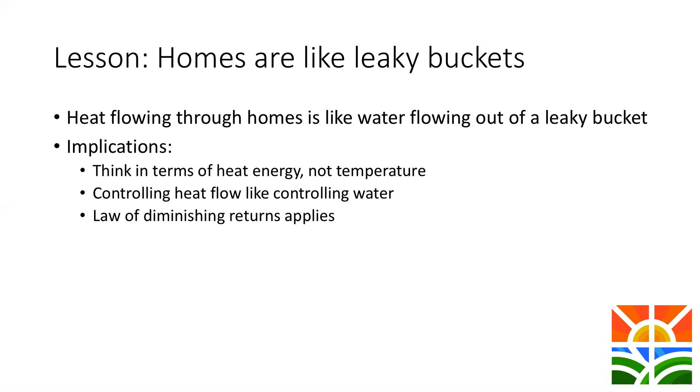Next lesson. Having seen lots of houses, I've formed the view that a useful way to think about houses is that they are like leaky buckets. Heat flowing through our homes is like water flowing out a leaky bucket. In this metaphor, each hole represents a different pathway for uncontrolled heat flow: walls, floors, windows, ceilings, and so on. The implication is that it's good to think in terms of heat energy, not temperature. Controlling heat flow is like controlling water, in a sense, metaphorically. And with that thinking, it helps us understand how the law of diminishing returns applies. So it's not worth your while going all out fixing one hole if you've got these other holes that haven't been dealt with, for example.

Good performance is impossible without fixing all or most of the problems. So in the leaky bucket metaphor, it's still a leak - if you start off with 5 big holes and you fix 3 of them, it's still a leaky bucket. In other words, it's important to look at the big picture and address, to the extent you can, all the pathways for uncontrolled heat flow. But patch the biggest hole first, you know, it's a good place to start.

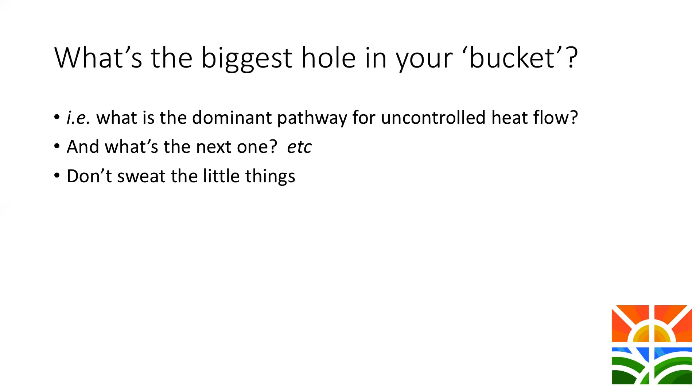So think in those terms: what's the biggest hole in your bucket? In other words, what's the dominant pathway for uncontrolled heat flow at your place? And then what's the next biggest hole, and so on, until you've really turned your leaky bucket into something that's a lot more tight. And don't sweat the little things. So this way of thinking can help guide decisions about priorities.

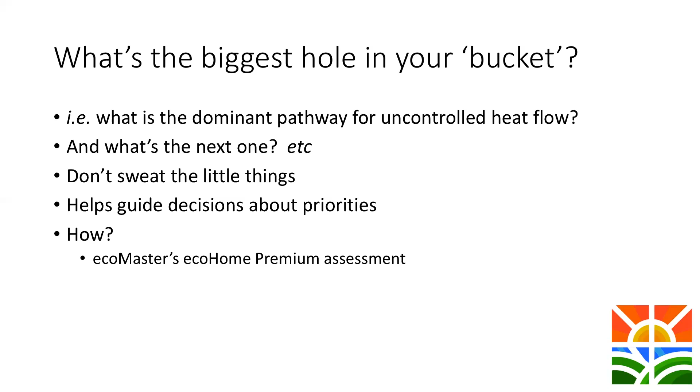When I do ecoMaster assessments, we look at it in terms of trying to characterize the heat loss pathways and determine the dominant ones, so people can understand where the heat's going and where to focus their efforts.

In that context, it's really important to take the view that the thermal envelope is where a large amount of our effort should be spent, as opposed to perhaps focusing on gadgets. Improvements to the thermal envelope obviously directly reduce energy spend.

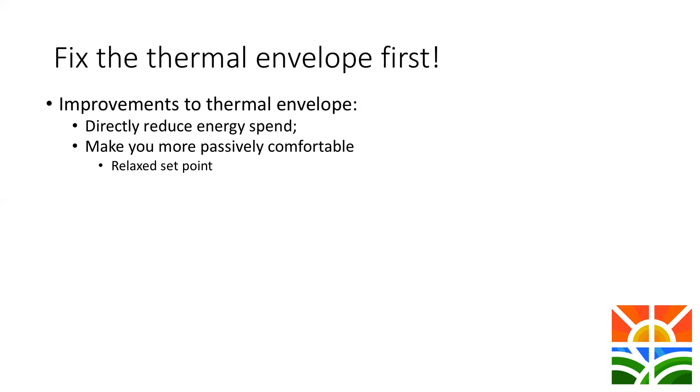That's obvious, but a lot of people stop there. Improving the thermal envelope can do so much more than just reduce your energy spend. It can make you passively more comfortable - you can ease off the set point on your heater if the thermal envelope is better. There are fewer hours of the year during which active heating or cooling is necessary.

It makes your house more resilient. In a climate changing world, it makes our houses more climate safe - in other words, they're at less risk of being dangerous places in extreme heat waves. Tight thermal envelopes reduce the risk of condensation, so less mold, improved air quality.

Heating systems work better - they don't have to work as hard, and they're not blowing on you as much. Less stratification of air.

A surprising side effect of having a better thermal envelope is the house will be quieter. There'll be less carriage of noise from outside to in when all the gaps are plugged and the insulation is better. And likewise, if you're having a party, your neighbours are going to be less disrupted by you as well.

And lastly, if you've got a better thermal envelope, you won't need as big a heating or cooling system to begin with. So there are all these other side effects of having a better thermal envelope, well beyond just reducing energy costs. It sometimes bothers me that this discussion in the popular media seems unreasonably focused on reducing costs, but there's so much more to it than that.

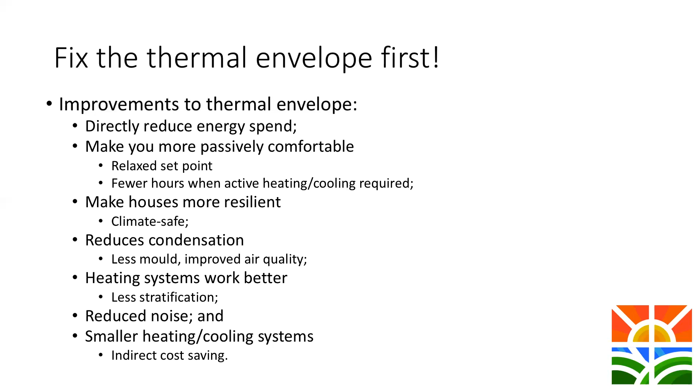Firstly, it's useful to think about heat going out different pathways, but it's not that helpful to think of these proportions as good generalizations because they're so incredibly variable. Going from one type of house to another - old house, new house, good house, bad house - these proportions change really greatly. Some houses have dominant heat flow through the walls, others through the windows.

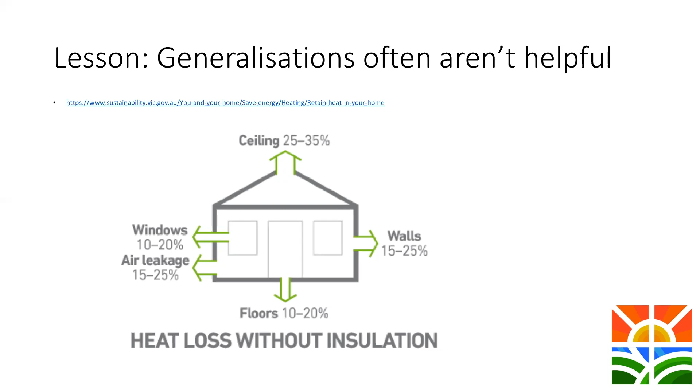Often these diagrams are without insulation, but nearly every house I ever see has some level of insulation in the ceiling. So thinking about this as the dominant pathway for heat flow isn't terribly meaningful when most houses have that pathway at least partially dealt with. Thinking about different pathways for heat flow is useful, but thinking about generalized percentages is not.

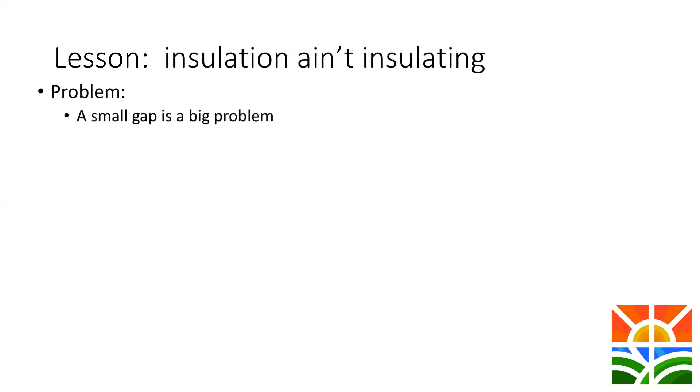Okay, talking about insulation - insulation ain't insulating. What do I mean by that? The problem is that small gaps can lead to big problems.

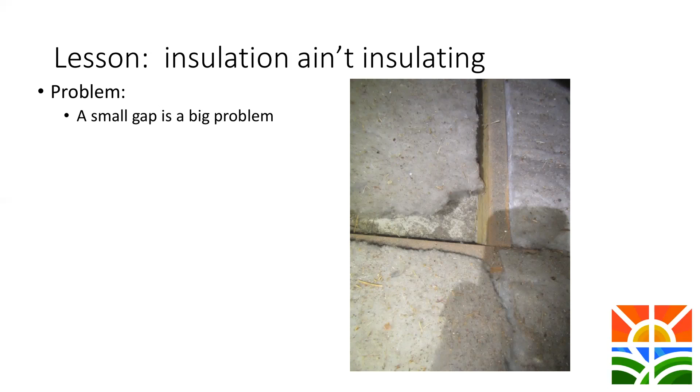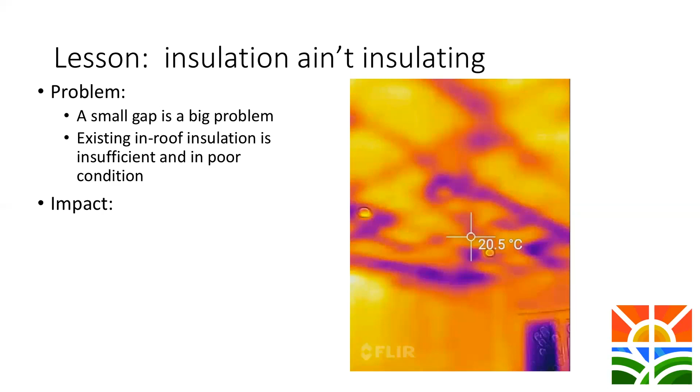Existing in-roof insulation is insufficient and in poor condition - that's my general take on things, having seen many of them. The impact is it compromises the thermal performance by a degree you might find surprising. In doing the home assessments, I generally have to estimate the net effective level of insulation, and it's generally about 1/4 of the minimum recommended.

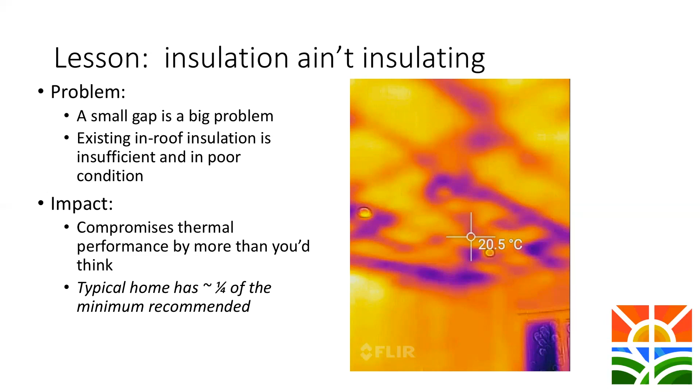So a lot of people have a binary view about insulation - insulated or not. But thinking insulated or not is really not very helpful when you've only got 1/4 of the minimum recommended.

To illustrate that point further, this is a table out of the building code that helps deal with insulation derating - understanding how much you have to adjust the level of insulation to deal with gaps that exist. In this table, if we've got R5 batts, that's the 5 in that cell, and 5% on average of the ceiling uncovered, then the net effective level of insulation is only 2.5.

And as the level of insulation you're after goes up, the proportion of uncovered ceiling you can tolerate drops off to a surprising degree. These cells here that are greyed out, you're not allowed to go there. Literally, in the building code, you can't tolerate those proportions of uncoveredness if you're trying to achieve these higher levels of insulation. You're just not allowed to do it, in theory.

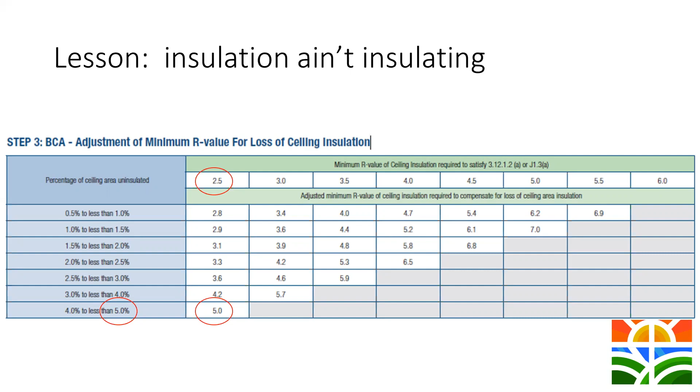How thick is an R5 batt? Well, that thick. Often you might achieve these levels with 2 layers. But anyway, there's a disproportionate impact from seemingly quite small amounts of ceiling uncovered, is the point.

So culprits: downlights. Here's a particularly egregious example of a downlight with seeds blown in through gaps impinging on this hot halogen light. So this is the insulation coming up to there, and there's this big uninsulated space around it. It's a requirement that large gaps be left around hot downlights - absolutely necessary for safety's sake, because these things get very hot. Insulation has to stand off from the lights, otherwise you risk a fire.

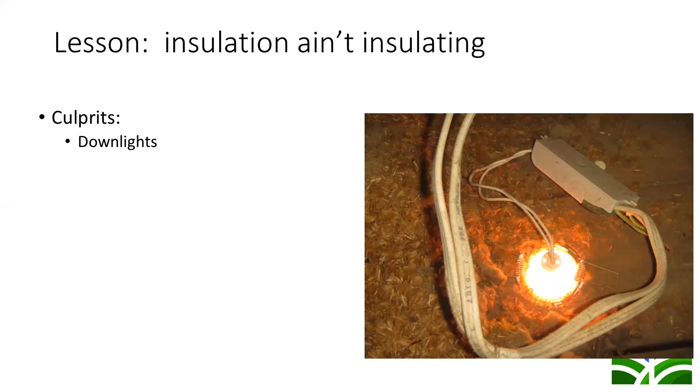Incomplete initial installation - here's an example, again looking down at my feet. That's my foot. Just big, large swathes of ceiling completely uncovered. I should emphasize the slides I'm putting here are not exceptions in the scheme of 500 houses. I see this literally in every single house, or 90+%, let's say. This is really the rule, not the exception.

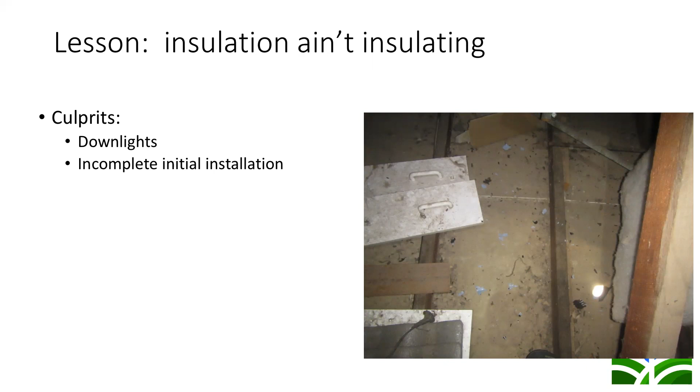Here's another example, again from this Monday, an extension. Big sections, no insulation. So insulation here, none there, some over here. Just having these swathes of ceiling uncovered makes a huge difference.

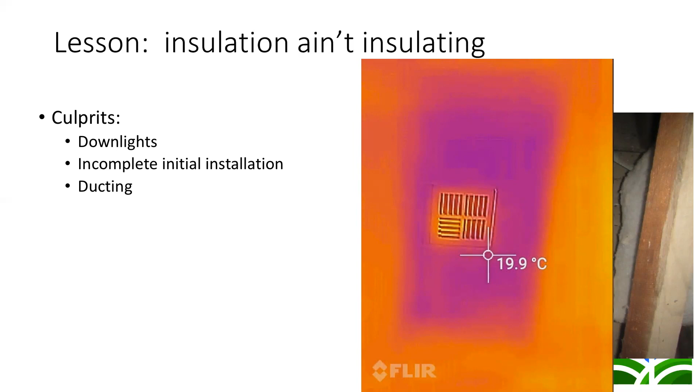Ducting. Here is a thermograph looking up at a ceiling. You're seeing the ceiling register with a big cold spot around it, where the house was built, insulation put in, and then trades have come in to install the ducted air conditioning in this case. That's the profile of one entire batt that's just been removed. And that's looking at it from the other side, so you can see what they've done - they've literally lifted up the batt, plonked it down there, put their stuff in, and just left it like that.

And that's really common practice - that's what you see in almost every case. Now in an ideal world, they'd take care and bring it back up neatly around the batt, around the vent.

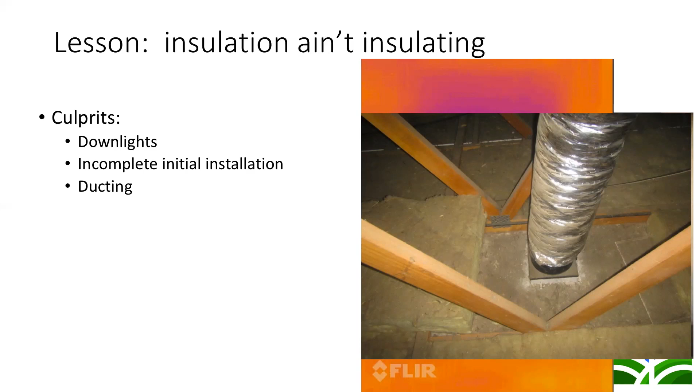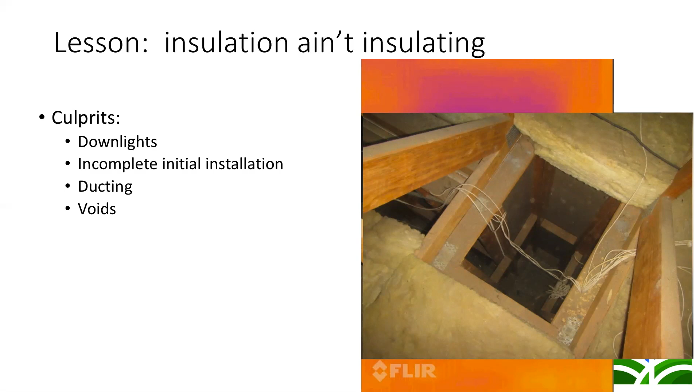Voids. Surprisingly, a lot of houses have these odd internal void spaces that people aren't aware about. That's just looking down into this void in a house where you've got insulation at the ceiling level, but the usefulness of this insulation is much less when unconditioned air from the ceiling can wander straight down and impinge on these plaster walls at personal level. It's not necessarily going into the house, but the heat can exchange easily through those plaster walls. So voids should be insulated is the message there.

Bulkhead walls. Lots of houses, especially extensions with rooms up in ceilings, have what I call bulkhead walls - walls that adjoin into ceiling spaces. So this isn't looking down at a floor, I'm looking across at a ceiling section, looking back at the back side of a wall in a client's house. You can see there's been an attempt to put some insulation in there, and then it just falls out. This is a section of someone's bedroom where there's just no insulation behind it. You generally see these bulkhead walls in second, upstairs rooms.

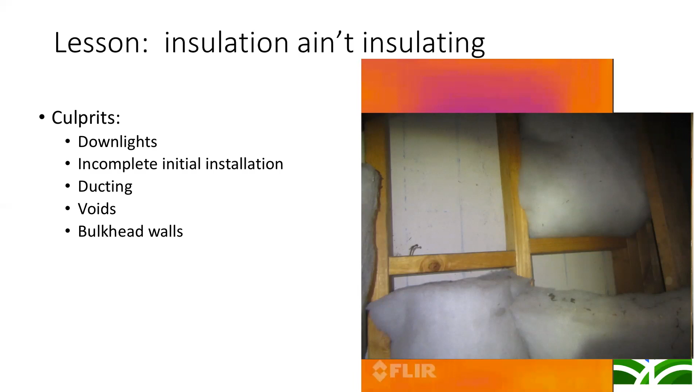Random damage by trades. This isn't uncommon, just to see batts strewn around. Maybe once they were carefully laid down, but random trades over the years are quite careless.

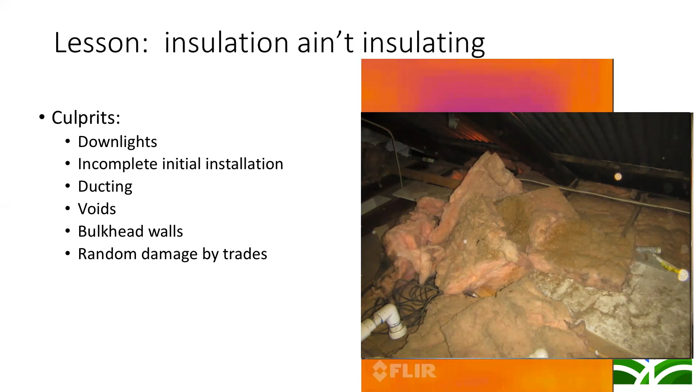Yeah, I wish that was the exception, but it's not.

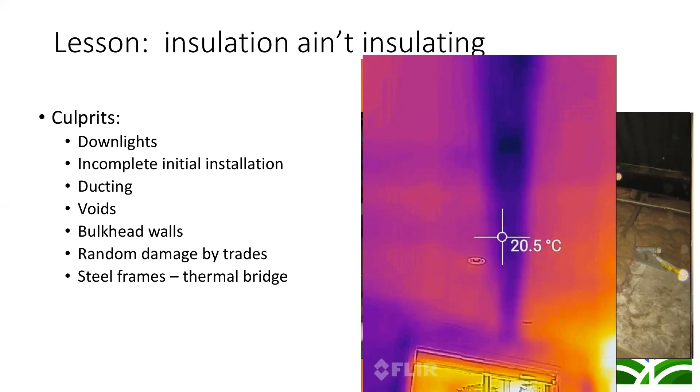Steel frames. This is a client recently that had a relatively new house, and you get the thermal imaging camera out and you see this big cold line across the kitchen ceiling where there's a steel frame. So you could have all the insulation you like here and here, but that steel frame's acting as a big thermal bridge, carrying heat into the house, or in this example, carrying heat out of the house.

Batts still in their bags. Maybe one house in 10 I see this at, where there's leftover material, or in some cases not even leftover, they just don't want to finish the job. The people doing this, I suppose, conclude that it's unlikely anyone's going to go and realise the job hasn't been finished. And they just leave bags of batts there.

That's the batt with the label on it. What's even sadder about this is these glass fibre batts, the shelf life of them is less than you would think, because their effectiveness to a large extent depends upon them regaining their full loft. Loft is the term used in the industry for how fluffy it is when it's laid down and in use. But if it's been sitting in a bag for 5 years, they're compressed in those bags and they're not going to regain their loft. So it's next to useless once it's been there. Put it this way, installing that would still be effective as an insulator, but much less effective than it could be if it had been installed properly to begin with.

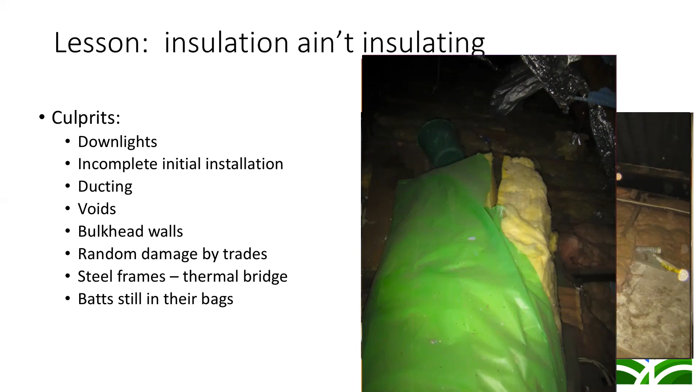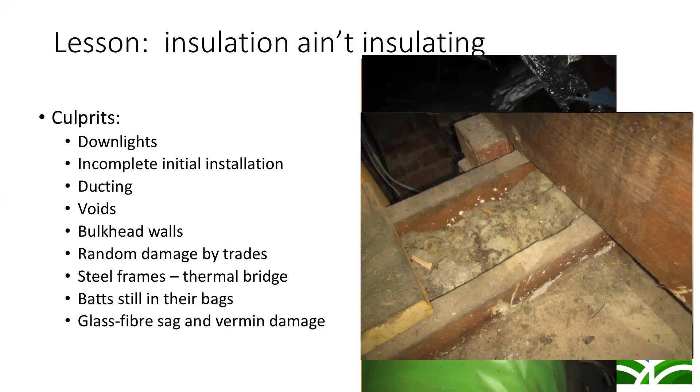How do we solve this? In a retrofit situation, in other words, if we're trying to overcome all those problems in an existing house, step one is usually to replace the downlights, and we'll talk more about downlights in a moment. Try to make good the existing layer of insulation, so finesse the batts that are there to the extent possible, using the existing material to put it properly in place, making good the existing layer.

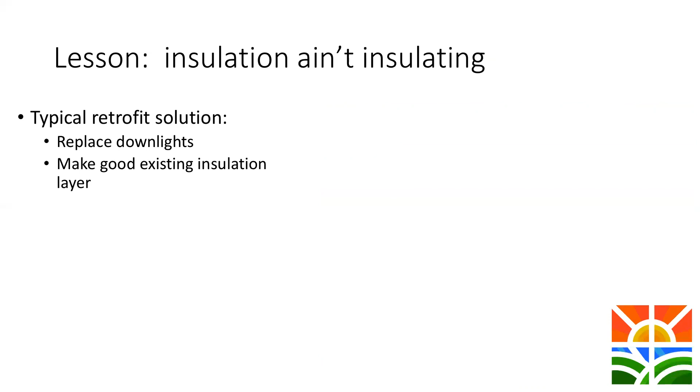So at the end, you want to target a net effective level of insulation, in my view, of around 5 to 6. In context, the minimum recommended level of insulation in Victoria is generally about 4. So going to 5 to 6 as your target is probably a reasonable thing to aim for.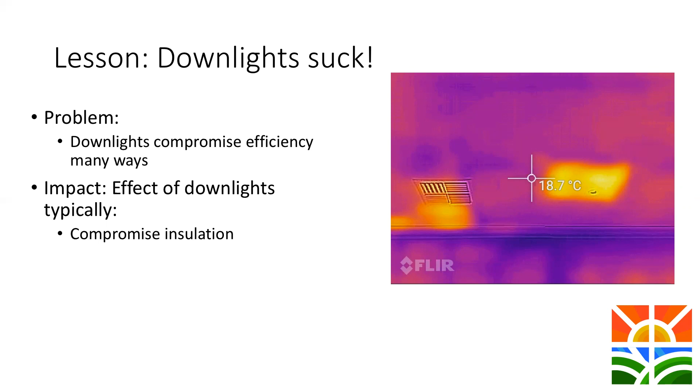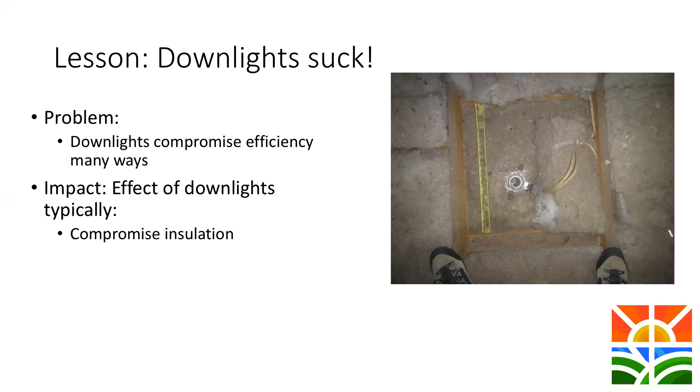So in this case, that's one big square of basically bare plaster with some dust on it that's not got any useful insulation.

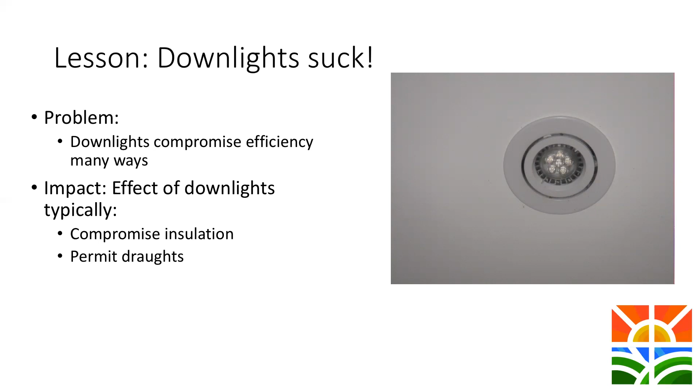Downlights permit drafts, so it's really common to have these type of downlight fittings. This is called an MR16 fitting, typically designed to originally have a halogen bulb. This one's been retrofitted with an LED bulb. The original fitting allowed drafts around this ring here, but perversely, in going from a halogen to an LED, it's actually made the draft situation worse, because the bulb itself has a ring of slots around the light that allow for ventilation for cooling of the light.

Then there's the obvious problem with downlights - they're often halogens, which from a lighting efficiency point of view are crap.

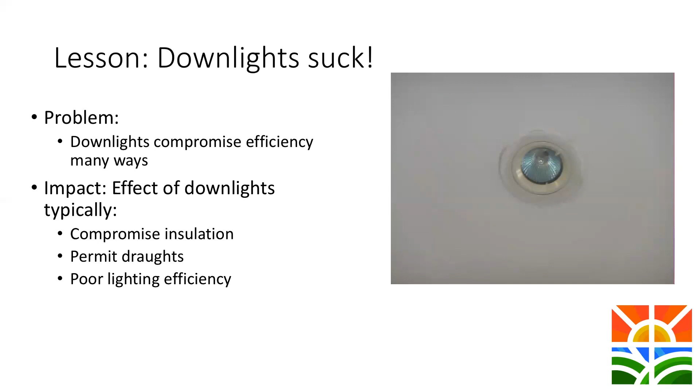So what many people might think of as a single problem being lighting efficiency, when it comes to downlights, it's actually a myriad of problems. They really are evil from an efficiency point of view.

So the worst case is these ventilated MR16 fittings with halogen bulbs, but better but still bad, the ventilated fittings with LED bulbs. Again, another example, more clearly showing the ventilation slots around the light. Yeah, so you do see these quite a bit.

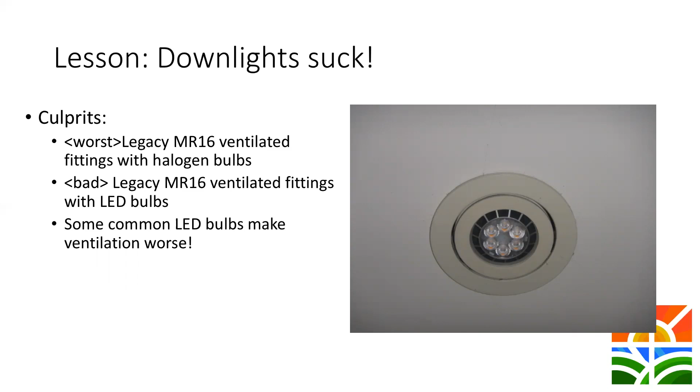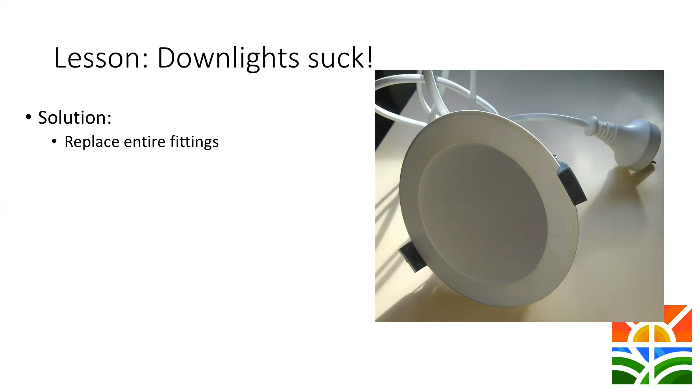So the point being here is that some common LED bulbs make the ventilation problem worse. The solution is not to replace the bulb. Don't replace halogen bulbs with LED bulbs is my message. Replace the entire fitting. So there is this here, okay? This is a good value, modern, sealed downlight unit. I call it sealed in the sense that there's no replaceable bulb. It fits in the same form factor as the one it's replacing. And if it fails, you replace the whole unit.

Some key points about this - if the electrician installs a socket like this on your mains wiring, then this is just an appliance in a socket. So it's legal and safe for mere mortals like us non-electricians to replace these. So if you've got these already in your ceiling, you can potentially fit these yourself. If you don't have these already, then you'll need an electrician to fit them in the first place, and then you can replace them yourself if they fail.

So these only cost $13 each. They're color temperature selectable, and they have an integral transformer. So they're pretty neat.

What are they called? Well, generically you call them sealed LED downlight fittings. These are from Reduction Revolution, and they're an Osram brand.

The key thing to look out for, the key message here, is you cannot assume that it's safe and legal to cover with insulation just because it's a sealed LED unit, okay? You need to see this symbol on the fitting, depicting the light with insulation over it. That tells you that it's safe to cover. If you don't see that, you're not allowed to cover it, okay? You also generally see the indication IC, meaning insulation contact, meaning it's safe to be in contact with insulation. If you don't see one or the other of those things, don't cover it. It's not safe, even if it's an LED.

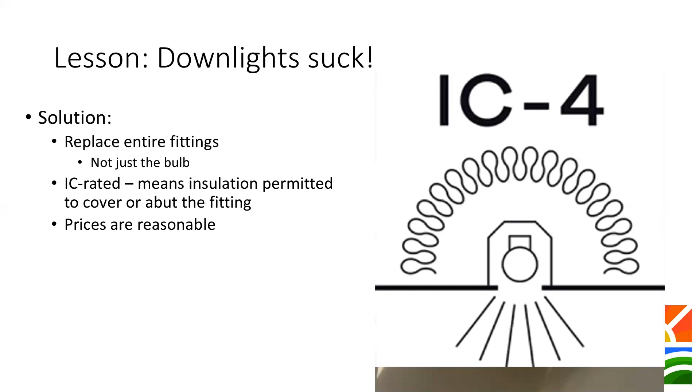What does covering the light do to its life? It's going to get much hotter. I just blogged about this the other day, and the short answer is not necessarily - have a look at my blog, and perhaps we can come back to this in the questions if we've got time. But I'm mindful that we don't want to be here all night, so I'll try and get through the material and we'll see how we go with time.

Okay, next lesson: passive solar design. Homes make poor use of available opportunities to use and control sunlight - that's my general observation. The impact of that is excessive heat loss or heat gain.

The basic passive design principles are: take full advantage of the sun. And that was an example of a place that didn't. In this case I recommended to the client, not as an immediate measure, but perhaps something to consider down the track, fitting a window in that wall, because it was just an opportunity going begging.

Lack of eaves - you see it all the time now. And I presume I don't need to explain why that's a bad thing.

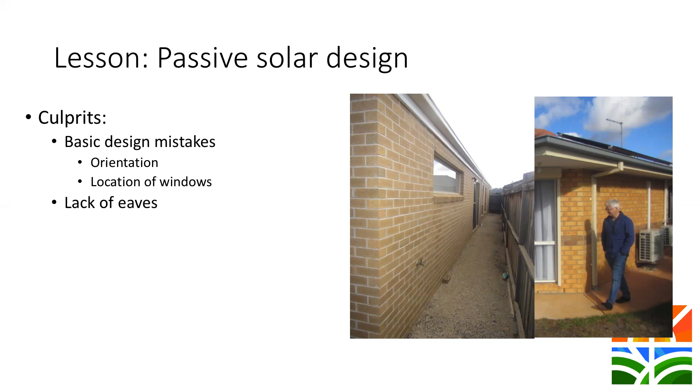Too much shading of windows. Here's an example, from that same house in the earlier picture.

Al fresco areas - I hate them. So the house didn't originally have this covered area. It had this nice courtyard allowing nice light into the three rooms that adjoined that courtyard. The previous owners had come along and fitted this, which meant these rooms became really gloomy, and it removed any opportunity to get direct winter warming into what's a north-facing lounge room window, which would have had some opportunity in the mornings to get direct winter sun - completely gone because of this covered thing.

I presume the people who did that thought they were doing a good thing, and yes, there are situations on a hot summer's day where that might make the place more comfortable. But the lost opportunity to get winter warmth and natural light into the house is just too big a price to pay, in my opinion.

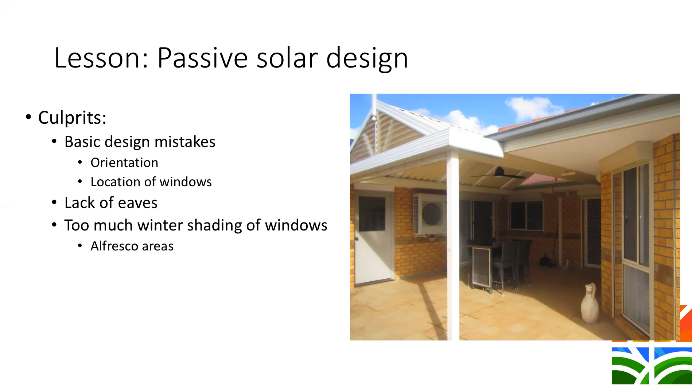So the solution - well, it's hard to retrofit fixes to fundamental design faults, but sometimes you can add a window, like in that example I showed a moment ago. Design with the sun in mind - it's really important.

What about taking the iron off and putting in Laserlite panels? Yeah, possibly, but often that'll give you daylight, but it won't give you direct sunlight to an extent that's useful.

Design with sun in mind - use the winter sun, block the summer sun. Here's an example - this is not far from here, in Carlton.

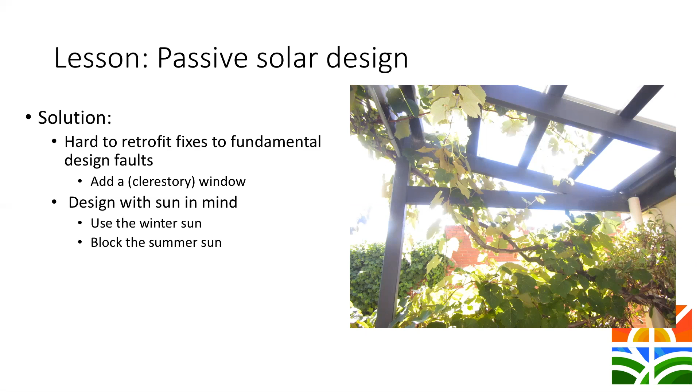An acquaintance asked for my advice on a way to make his back room more pleasant. The idea was to have this pergola arrangement that actually sloped upwards to let the winter sun come in underneath it. Often these things are horizontal, and then they shade the adjoining living spaces too much. But by slanting it upwards, on a winter's day you're letting nice warming sun come in underneath that. In this case you've also got deciduous coverings. I think that works quite well.

I advised on this, but I didn't build it. If I had, I would have made that slope slightly steeper - it's maybe only 15, 20 degrees slope, whereas 30 degrees would be a good amount.

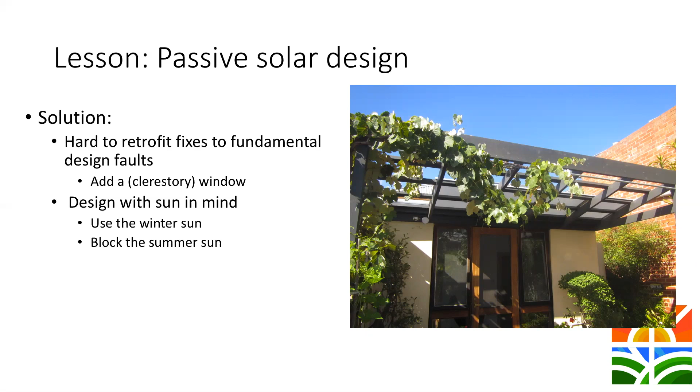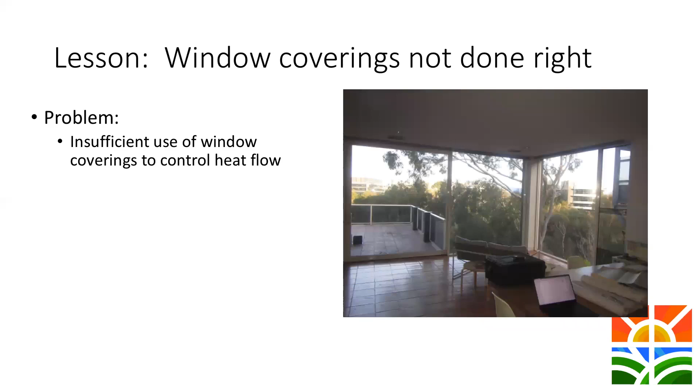Lesson: window coverings aren't done right. Window coverings are really important. Here's an example - often houses have big windows with no window coverings. Here's another example - I don't know whether some of you might recognize that, that's the Core 9 house down at Cape Paterson. It's a really great house, I love it, it's 9-star rated. But no window coverings - what the hell?

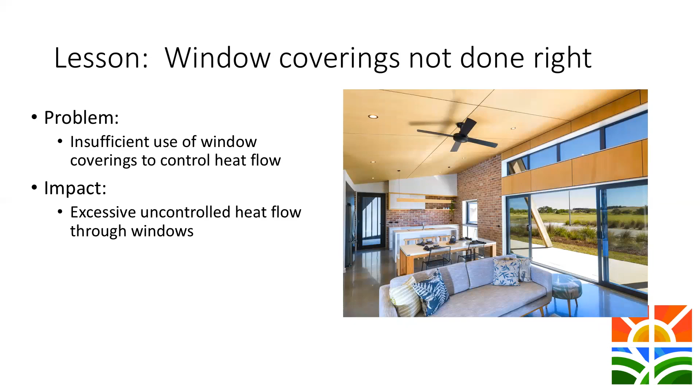Just because you've got double glazing doesn't mean you can get away with not putting decent window coverings on. The impact is excessive, uncontrolled heat flow through windows, even double glazed ones. So the solution is good window coverings. Ideally you want something that holds a relatively still layer of air against the glass. To do that you need a material that's impermeable, and a carrier against the architrave that doesn't have a gap, so there's no easy flow of air up through a gap between the carrier and the architrave.

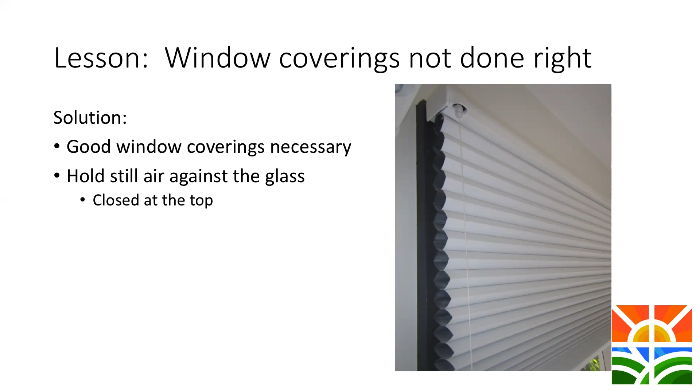Or a pelmet, good old-fashioned pelmet. This is an example of what's called a cellular blind. I'm a big fan of cellular blinds, we'll see some more in a second. You want that closed at the top. These ones are sheer, meaning they let some light in still when they're down. These are the ones at my place, looking at them from the side, you can see the little pockets of air. So not only do these hold a layer of air against the glass, but they also hold a layer of air within the structure of the blind, which is very effective at adding additional insulation.

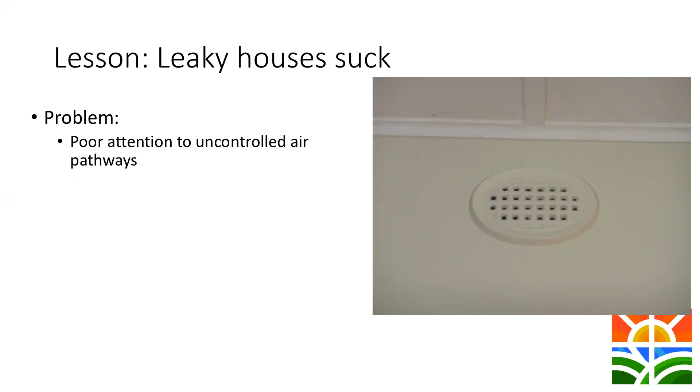Moving on. Lesson: leaky houses suck. Poor attention to uncontrolled air pathways is a big problem. I'm illustrating that point with a wall vent. The impact is loss of beneficial heat and coolth, and potentially the ingress of dust, insects, and noise. So it's more of a problem than you might think.

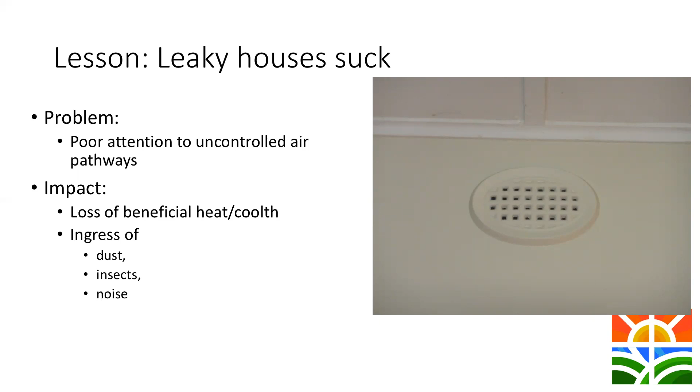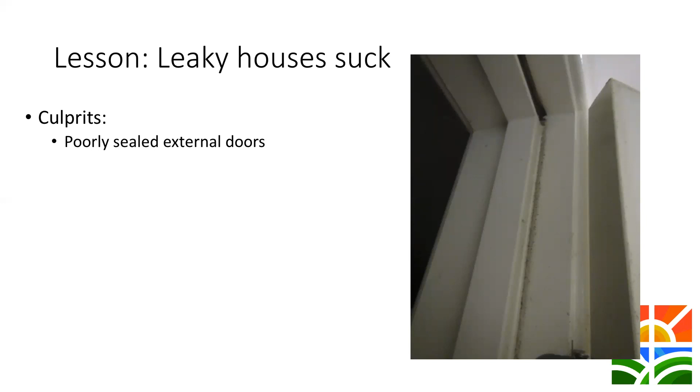When you go home, have a look at your own doors, I bet you'll find one. What that tells us is doors, when closed, don't perfectly seal against the door jamb - there's nearly always a gap. What you often find is the door, when closed, engages properly with the jamb near the latch, but the door is very slightly warped. So if we assume the door jamb is dead straight, the door is slightly warped and doesn't engage properly with the jamb at the top and bottom. So you end up with these pathways for air around the doors that, as a result, aren't properly sealed.

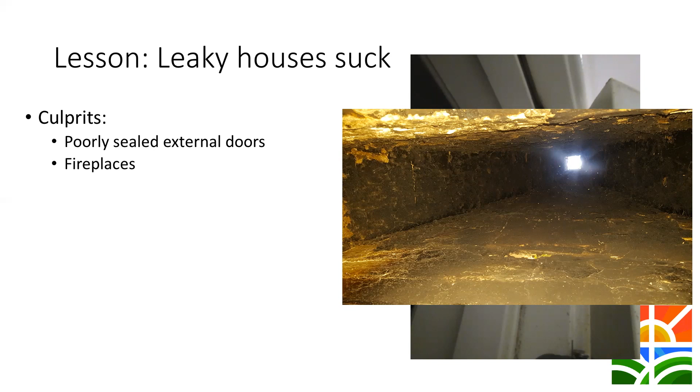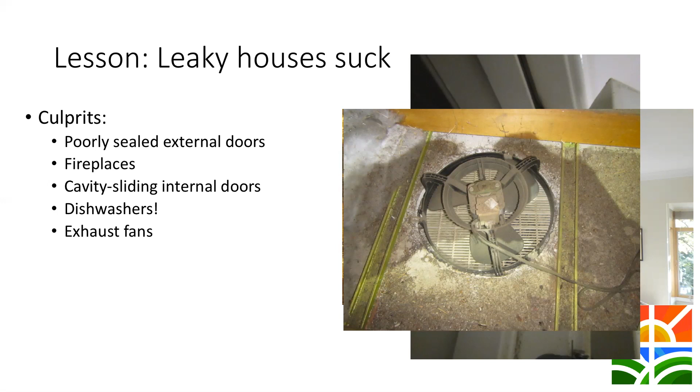Well, my thermal camera is a phone with a thermal camera in it. So yeah, not that unusual. It's not as weird as you think that I had a thermal camera with it.

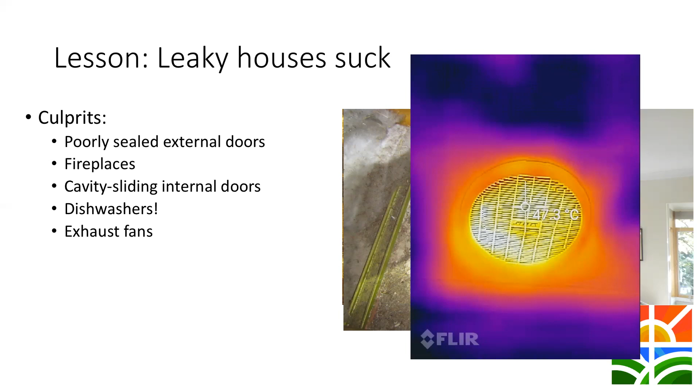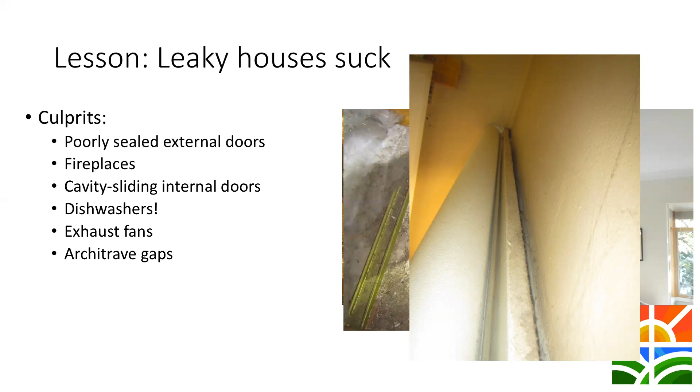Architrave gaps, you see it all the time. You'd be surprised. Get up on a chair carefully, don't break your neck on my account. If you look at the architraves around doors and windows, at the top, you'll very often find a gap where it hasn't been sealed properly or the architrave has come slightly away from the wall. Sometimes they're big enough to put your little finger in, but more often it's maybe credit card size or two credit card thicknesses deep. But because there's such a long length of these, when you add them up all around the house, you end up with a ready exchange of air between inside and out.

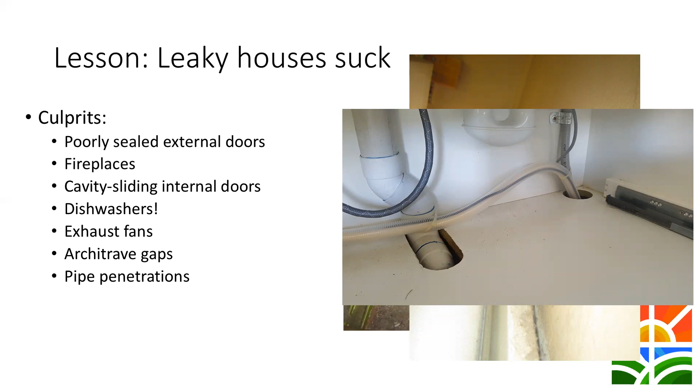Pipe penetrations. Obviously, where these pipes are going through, there's pathways for draft. So there's lots of these in nearly every house, and the net effect is you're losing a lot of beneficial heat or cool to outside.

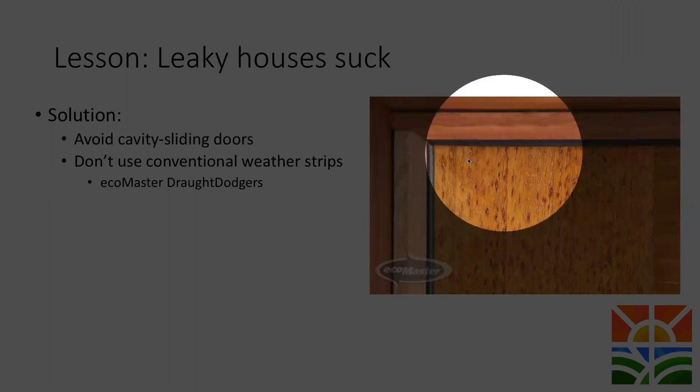So that's the seal around there, against the door frame on the outside and the face of the door there. So it fits neatly and adapts to any warp of the door, and you've got enough latitude in that seal to give a good net effective seal. So I'll pass that around. They come in long strips, and you generally put them on the sides and the top and use something else on the bottom.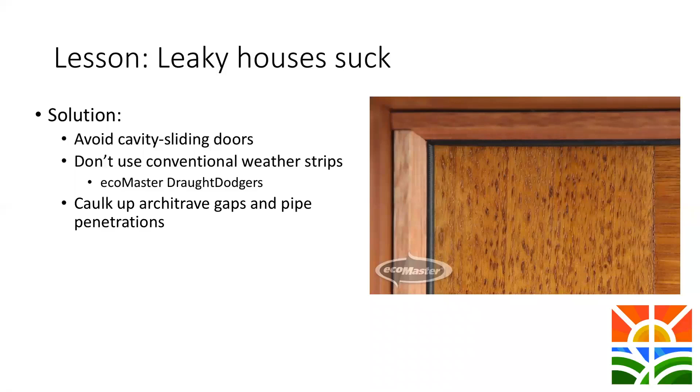Caulk up architrave gaps and pipe penetrations, upgrade exhaust fans. So here's an exhaust fan fitted with what's called a draft stopper. It's like a collar that fits over the exhaust fan with a pair of flaps that are held shut under their own weight. As the fan comes on, the flaps open up and then fall shut under their own weight as the fan turns off.

So where do you buy these draft stoppers? You can get them from Renew, I think Renew sell them in their web store. ecoMaster sell them, you can get them from the Environment Shop. So readily available. They are available, yeah, Bunnings. So they're easy to fit. Not all ceiling fans will accommodate them, but there's a simple example of one that does.

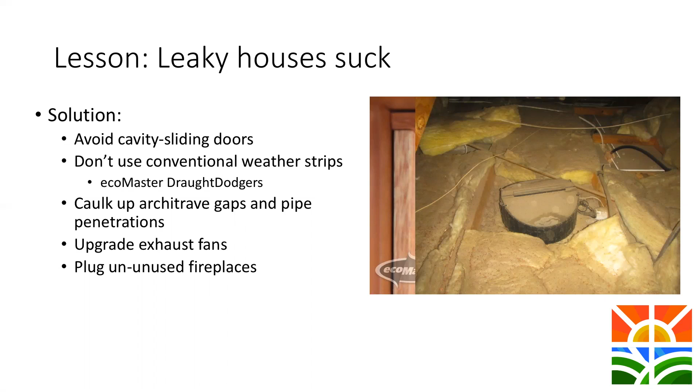Plug up unused fireplaces. Generally, the best way is to get a block of foam rubber and carve it with a knife to make a conformal plug that stuffs up into the fireplace. Yes, this conformal plug makes something that's removable, but as suggested, make sure there's some obvious indication that it's present should someone try to light a fire.

So further about fires, aside from the fireplace as a source of draft when the fire is not in use, the fire is a big problem when it's in use as well. There's a balance that exists between the flue gases discharged up the flue and air that's drawn in from outside. In other words, every litre of flue gases has to be balanced for the sake of pressure with air drawn in from outside. So you can think of it as fires inducing drafts - I think of them as draft amplifiers. The impact is that you can't just think in terms of the warmth coming from the fire, you have to offset that by the cold air it's drawing in from outside.

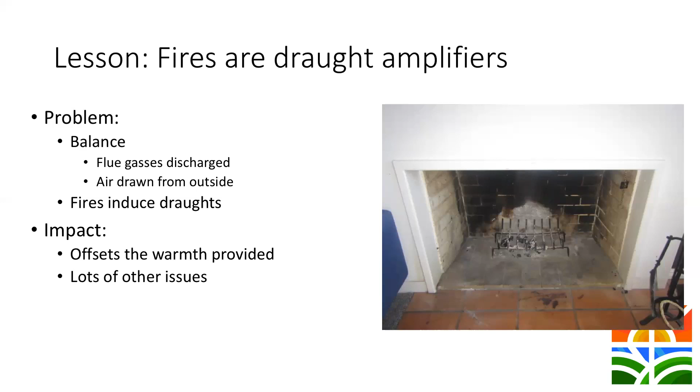And we don't have all night to talk about the myriad of other problems with using fires, so the solution is don't use fires. Is that only open fires though, or is it?

Inducing drafts also applies to some gas fires as well. A modern gas space heater that's just on the wall typically has what's called a power flue or balance flue, so it's drawing air in for the combustion from outside and then passing the flue gases back out. That's okay, it's not inducing drafts, but some still commonly and widely used gas fires aren't like that - they're drawing air for combustion from within the room, which is in turn inducing drafts from outside.

Next lesson: solar hot water is flaky very often. In the course of doing about 500 houses, I've seen quite a few houses that have pre-existing solar hot water systems. And in nearly every case, the existing solar hot water systems I've found to be faulty by the high-tech method of just putting my hand on the valve and seeing that it's completely cold.

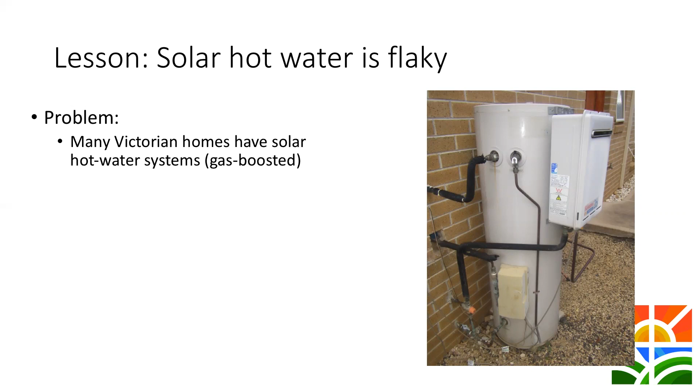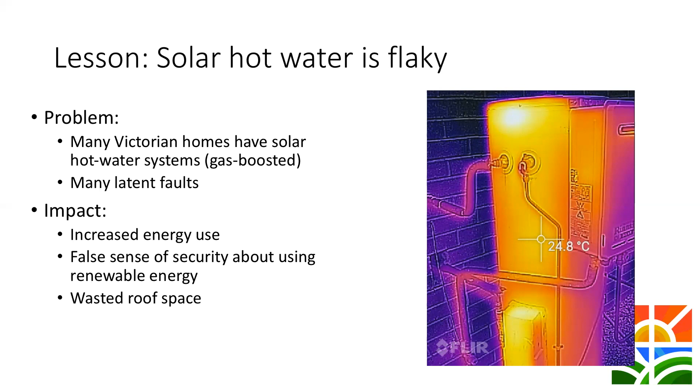So here's a thermal image of the faulty one. What you're expecting to see is a nice healthy glow from these fittings and pipes because the tank has some useful warmth from the sun in the tank. But the net effect is the gas booster is doing all the work, so well that the occupants don't notice that it's actually failed. And it's surprisingly common - so many latent faults are out there. The impact is increased energy use, a false sense of security about using renewable energy, and wasted roof space, in the sense that it could potentially be better used for solar PV.

So the culprits here are the budget flat panel solar hot water units that are really common on a lot of houses. In Victoria, as part of the energy certification for new homes, it's necessary to get either a solar hot water system or rainwater harvesting. And often the builders go for the solar hot water because it's cheaper, but they get the cheapest possible units. And what I've just described is often the net result. So as you go driving down the freeway and you see all these new houses with lots of solar hot water units on the roof, you can reasonably conclude that a high proportion of them are actually faulty.

So quality evacuated tube systems are not in this category - they're generally quite good. These systems are failing in a way that's often not seen because the shortfall is entirely made up by the gas booster.

Arguably, this is an unintended consequence of regulations that are otherwise quite good. In other words, the government has made it a requirement to put in solar hot water or rainwater harvesting, but as a result, we've got this. As much as I hate to say it, this good regulation has led to what I think is a shame, where there are hundreds of thousands of these faulty units out there and people don't even know it. So from an engineering point of view, that failure mode is in a way a graceful failure, in the sense that it's not stopping people getting hot water, but because you don't see it, it's a problem.

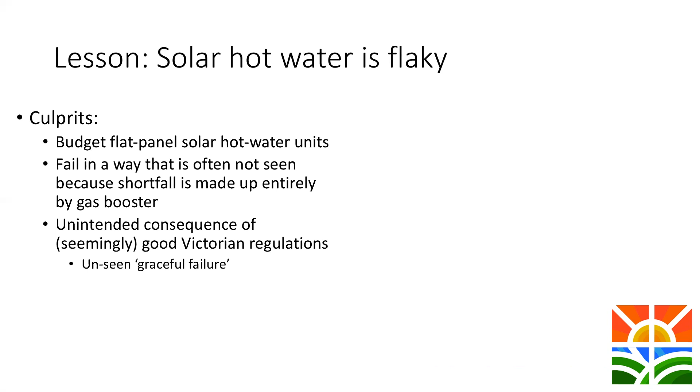Is the fault, like where is the fault coming from? It could be from a number of things - it could be from the failure of the pump, because these are pumped systems. It pumps the hot water between the tank and the collector based on a thermostat. So the fault would generally be either a faulty pump or a faulty temperature sensor. It's the apparatus itself, or whether it's being manufactured, installed correctly, or maintained properly.

And often the time and effort needed for a plumber to troubleshoot these things properly could take a good plumber who knows about solar hot water a few hours to fix this.

Alan, you work with solar hot water - do you want to comment? Yeah, I guess most of those systems put on new houses are very basic, like you say - the cheapest they can get. Often undersized. You definitely have good quality systems though.

So my conclusion is in Victoria, don't use solar hot water. There are other reasons why you shouldn't, beyond just what we've talked about. Keep your roof for PV, and there are other ways of getting efficient hot water.

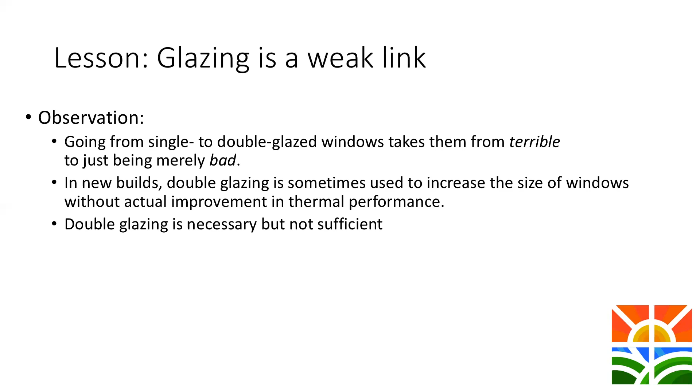So the solution is in new builds, don't overglaze, double glaze if possible. In a retrofit situation, that is an existing house, fit secondary glazing if possible. I'll explain what secondary glazing is in a sec. In terms of thinking about windows, think about the glazing and the window coverings as being something that needs to be considered together, because they work together to give good thermal performance.

So this is an example of secondary glazing. Secondary glazing is distinct from double glazing in that it's something that's added that gives the effect of double glazing. So this is the glass of the existing window, and this is the profile, just to show the point, sitting in the reveal of the existing window. It's adding a perspex additional layer that's held in place by some new moldings.

And that's one type that suits fixed windows. This is an example of ecoMaster's ecoGlaze product. Here's another example. So there are three different types, and you can get this stuff from other vendors as well, but this is the ecoMaster product. So imagine this is the existing frame and glass.

This is possibly from an awning window, maybe like a wind-out window, or it could be a door. And you want to double glaze that. So instead of throwing away an otherwise perfectly good window or door, you get a perspex sheet that fits over, gives you a nice air gap to reduce the heat flow. That perspex layer is held in place with these magnetically held moldings, to give something that's added onto an existing thing, but is quite discreet.

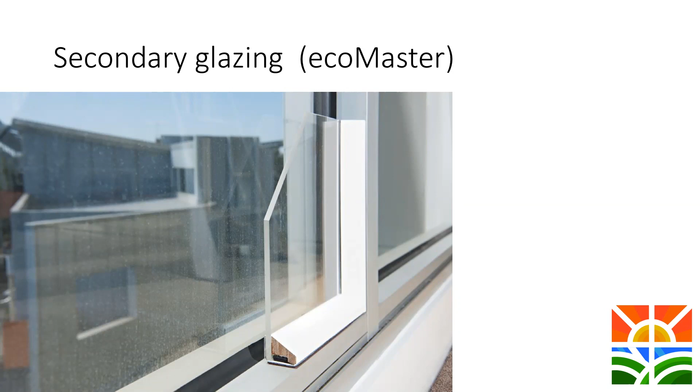Just another lesson that doesn't relate to the structure of the house itself, but more about the conduct of assessments. Something I've learned is that people tend to like talking about the house, so there's an element of therapy to this. When you go into a house and talk to someone, it's a conversation that generally involves some light bulb moments, which tends to be good fun. It's usually quite a rewarding experience for me and the client.

An important lesson I've learned relates to the relative performance of old houses versus new houses. A simple view is that new houses are better than old from a thermal point of view, and that's true, but misleading for a couple of reasons. Old houses generally are worse to begin with, but perversely, often the older houses have better scope for improvement.

Why is that the case? It's because of some practices often seen in newer houses that aren't seen in old houses. Eaves are missing often in new houses. There's a big tendency to have much larger windows in newer houses. And there's the prevalence of downlights in newer houses, which have the effect of derating the insulation, as we've discussed.

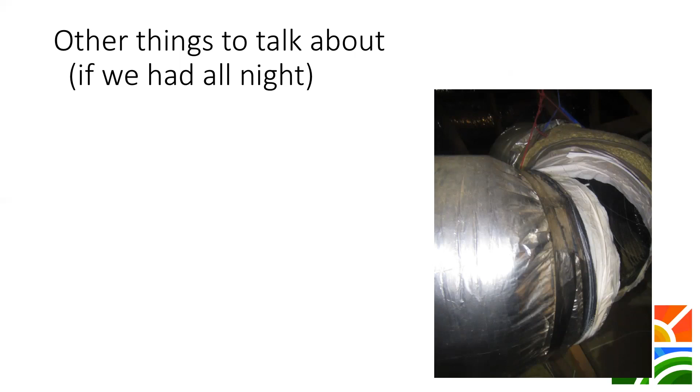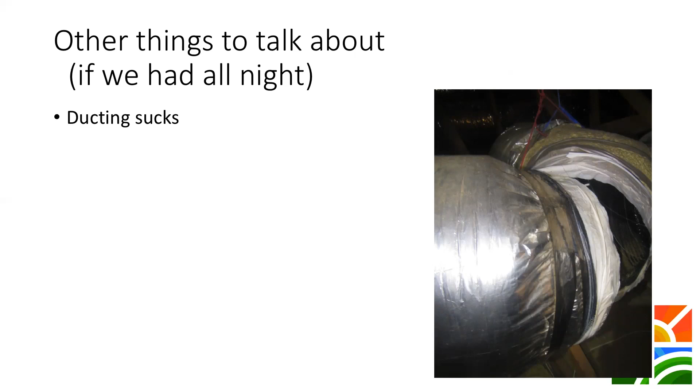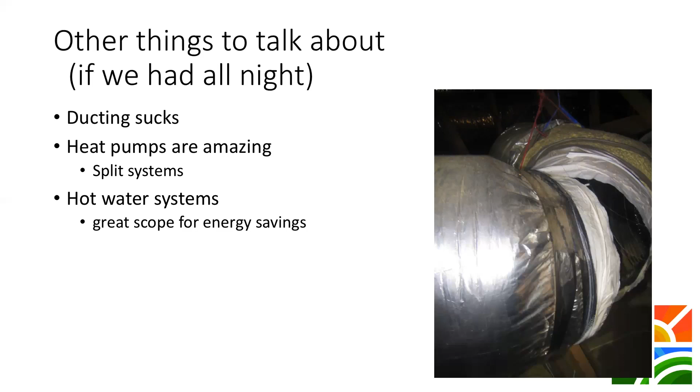If we had all night, there's a whole bunch of other lessons we could talk about, but I'll just mention them in bullet point form. Ducting sucks. To illustrate that point, here's a client's house with a duct that's split open. Heat pumps are amazing, split systems in particular. Hot water systems, there's enormous scope for houses to save more energy by fitting good hot water systems. Hot water pipes are never properly insulated.

It drives me crazy. All electric homes, that's something we should be aspiring to, getting off gas. It ends up being cheaper generally to operate a house efficiently and all electrically. And there's a whole great emissions reduction story that goes with that if people care.